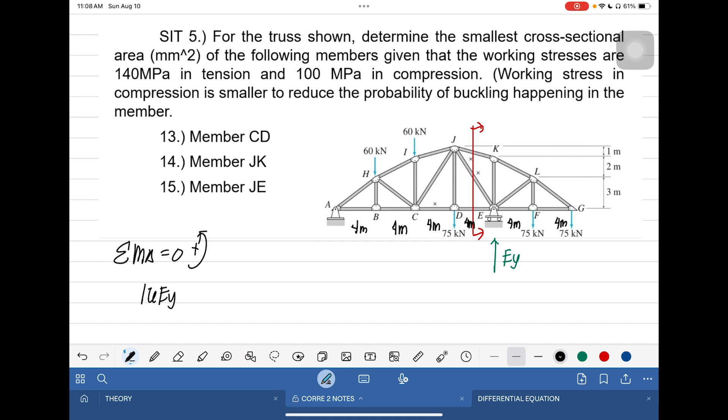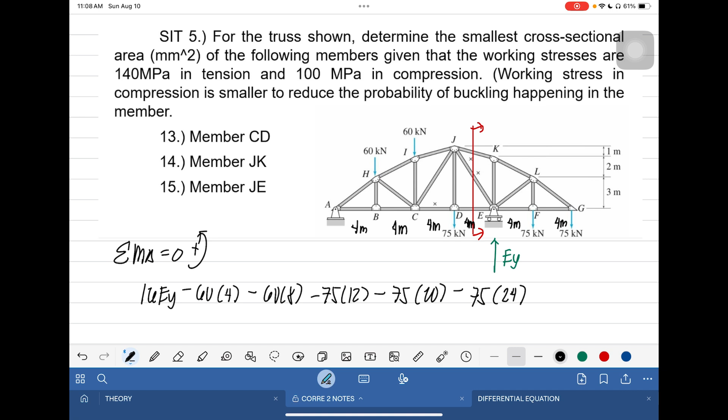Ayun, so ito po pala ay tig 4 meters. 4 meters, 4, 4, and 4. Okay? So mag-moment tayo sa A. Ang distance ng EY ay 4 times 4, that is 16. EY minus 60 times 4 minus 60 times 8 minus 75 times 12, minus 75 times 20 minus 75 times 24, equal to 0.

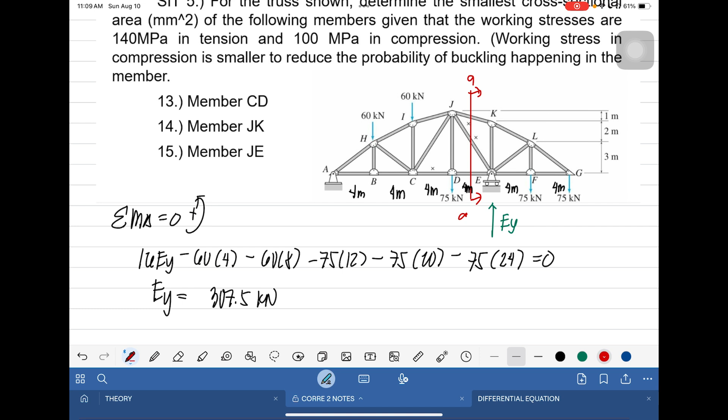Okay, we have EY. EY is equal to 307.5 kilonewton. Okay? So, isolate natin yung cut section po. This is section AA. So, ito na yung kakalabasan niya. Ito si roller. Ito si 307.5, 75, 75. Okay? Next, this is force DE.

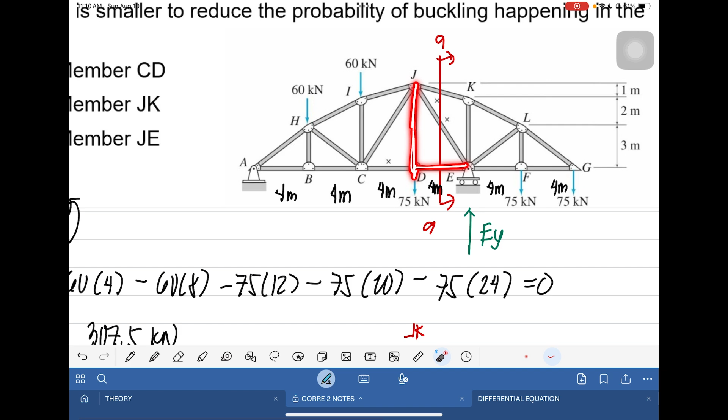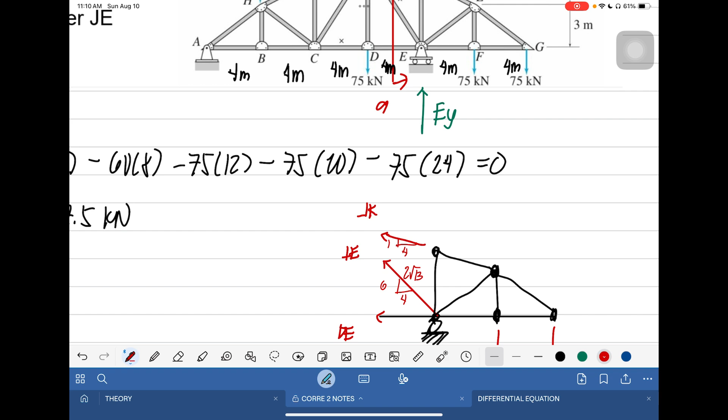This will be force JE. This will be force JK. Okay? Wala tayong slope. Again, pag nagsi-slope tayo, kailangan natin ng right triangle. So, this will be 4 and 6. 4, 6, 2 square root of 13. Okay, how about JK? JK will be 4 and 1. 1 squared plus 4 squared is equal to square root of 17.

Okay, wala nang nalimutang load. Unahin muna natin, summation ng moment sa E. Summation ng moment sa E equal to 0, counterclockwise positive. So, ang iikot lang po dito ay yung horizontal component ni JK at yung dalawang 75. Bakit? Kasi ito at ito ay tumatama kay E. JK 4 over square root of 17 times the distance 5, minus 75 times 4 minus 75 times 8 equal to 0.

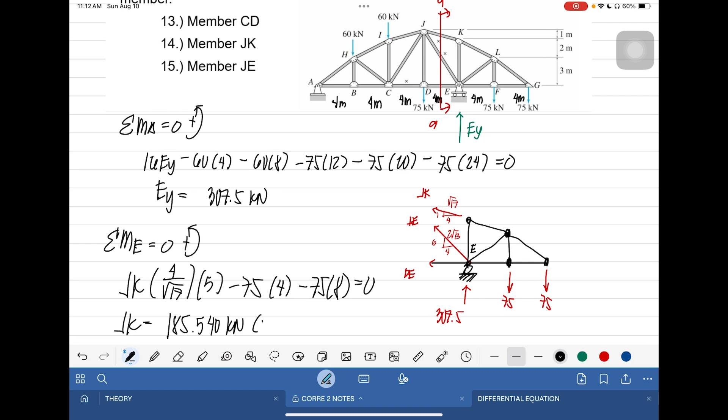JK is equal to positive 185.540 kilonewton in tension. Okay? Next, summation tayo ng forces vertical para kay JE. So JE times 6 over 2 square root of 13 plus 185.540 times 1 over square root of 17 plus 307.5 minus 75 times 2 equal to 0.

JE is equal to negative 243.37 kilonewton. Okay, so under compression po siya.

Next one, para makuha si DE, summation ng forces horizontal equal to 0, positive to the right, we have negative DE. Negative yung direction ni JE, negative din yung magnitude, 243.375 times 4 over 2 square root of 13. Then, yung arrow ni JK negative, magnitude positive, 185.540 times 4 over square root of 17.

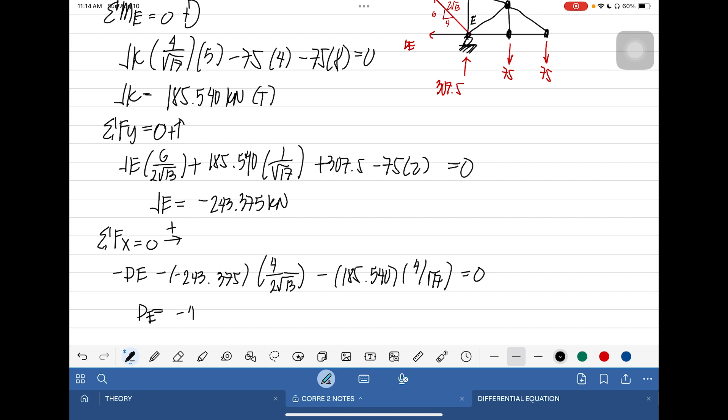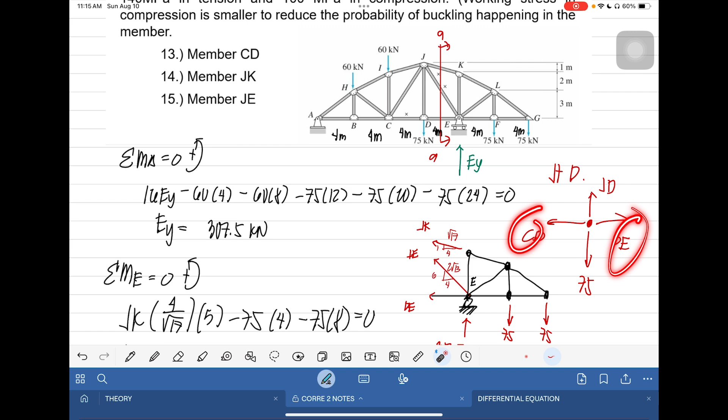Okay? So, kung mapapansin niyo po, pag nag-joint tayo sa D, ito si JD, ito po si 75, then this will be DE, and this will be CD. So by inspection po, we can say na si DE at si CD dapat mag-equal or else gagalaw yung joint along horizontal. In equilibrium, dapat hindi gagalaw. So mula doon, we can say that DE is also equal to CD. Kaya lang, compression siya.

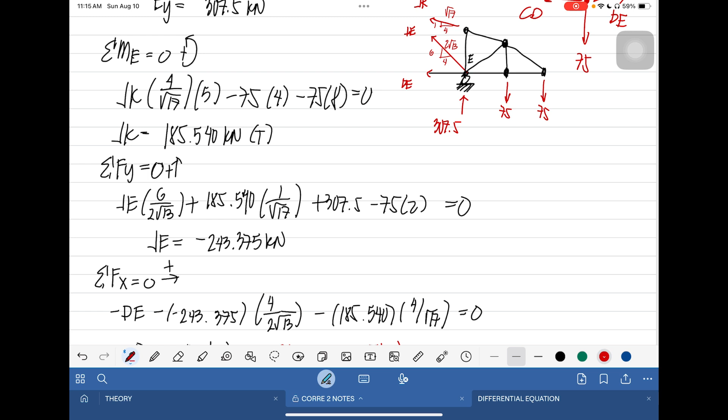Pero hindi yung forces yung hinahanap natin. Ang hinahanap po natin ay area. So tandaan nyo ang base unit ng MPa. Ang MPa po, that is equal to Newton over mm square. So pag nag-convert po tayo, dapat naka-Newton po yan pag kumuha tayo ng area.

AJK, that is equal to force, 185.540 times 1,000 over the working stress for tension, that is 140. The area JK is equal to 1325.286 mm square. So this is our answer for area JK.

For JE, ganun din. Para makuha si area JE, gagamitin natin yung pang-compression, kasi yung assumption natin tension, eh nag-negative. Ibig sabihin, dapat compression siya. So we have 243.375 times 1,000 over the working stress for compression, 100. That is equal to 2,433.75 mm square. So this is our answer for JE.

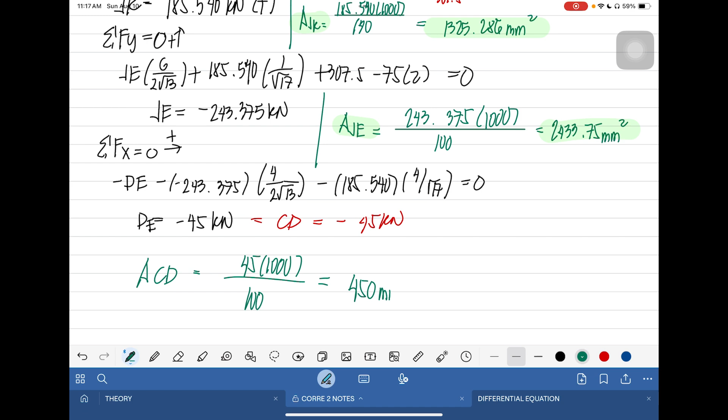Okay, next for CD. ACD is equal to 45 times 1,000 over working stress for compression, 100, which is equal to 450 mm squared. Okay, so this is our answer for situation 5.